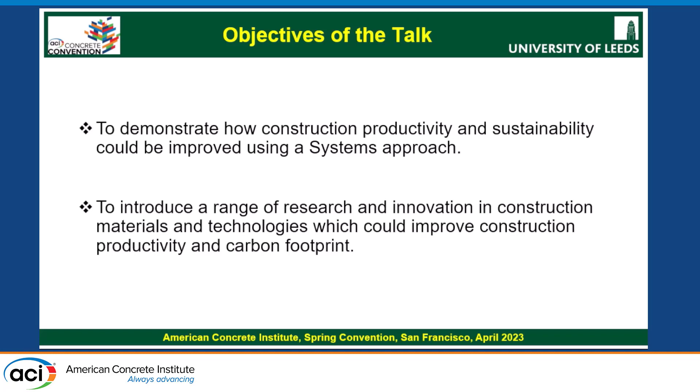The objective of the talk is to demonstrate how construction productivity and sustainability could be improved using a systems approach, and to introduce a range of research and innovation in construction materials and technologies which could improve construction productivity and carbon footprint. Those are the two objectives for this presentation.

The outline is as follows: I want to mention the productivity and environmental challenges in the construction industry, and the justification for a systems approach to deal with these challenges. After that, a brief introduction to different technological innovations which can benefit building productivity and sustainability, and finally I will conclude with some remarks and recommendations.

So first is productivity and environmental challenges in the construction industry. I just want to say this talk was initially prepared for 40 minutes, but then cut down to 25 minutes, so I'll hopefully finish in 25 minutes.

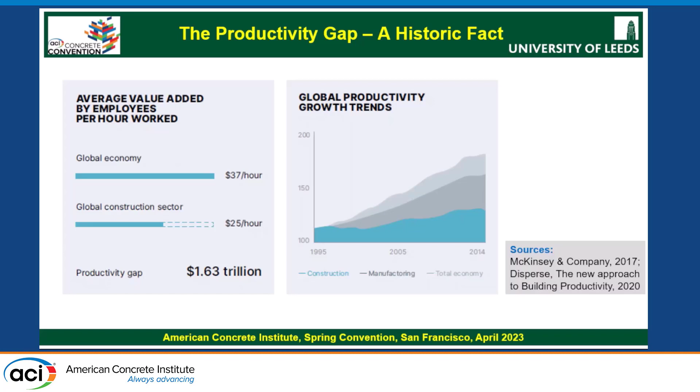If you look at this graph, you can see the major issue with construction productivity. Global economy is at $37 per hour, and if you look at the construction sector, it is 25. There is a productivity gap of 1.63 trillion US dollars, according to a report in 2017. That gap can be seen here - the construction sector is the blue, compared to manufacturing and the total economy. So naturally, we have a serious problem in the construction sector.

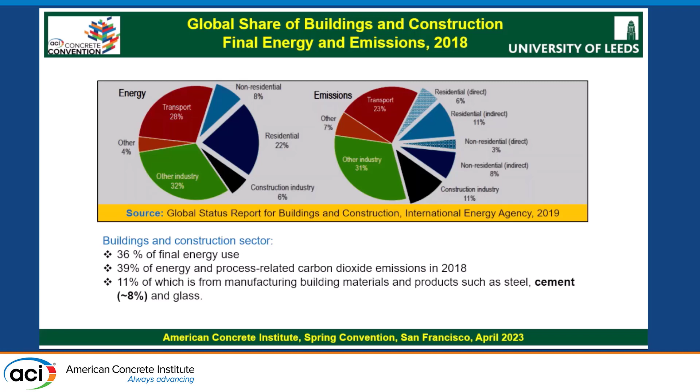11% of which is from manufacturing building materials and products such as steel, cement, and glass. And as you know, cement contributes to something around 8%.

So all of us are aware of the UN declaration as well as different countries trying to get to net zero, and we are possibly on the right track. You can see the carbon footprint coming down, and we are hoping this will hit very close to zero by 2050.

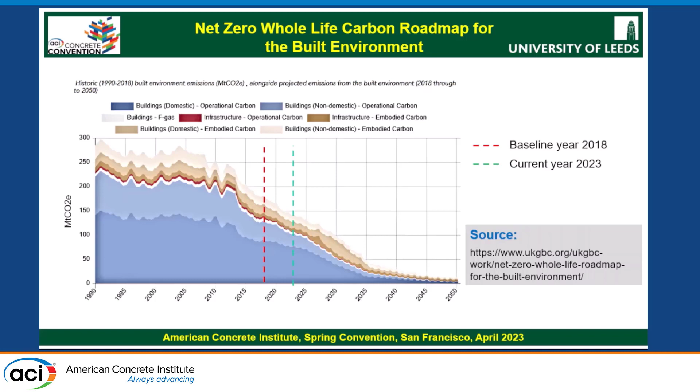In order to achieve this, what are the ways we can achieve it? This is where a systems approach would be really useful. So to address both the construction productivity and the carbon agenda, we should be able to use a systems approach.

Why am I saying this? The Institution of Civil Engineers published a report recently, a systems approach to infrastructure delivery. When you read through that report, you will see how construction productivity can be improved and how the carbon agenda can be addressed. I thought it important to introduce this report so you can see how each of the sectors where you're working could benefit from it.

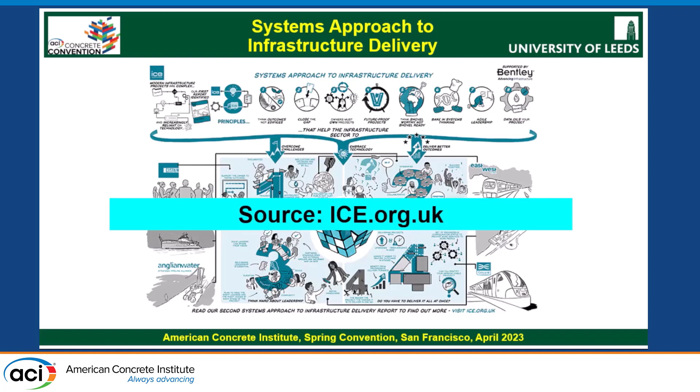In the systems approach to infrastructure delivery, there are 4 fundamental principles to look at: systems thinking, systems engineering, systems integration, and the extended system. Systems thinking embraces the idea that the whole is more important than the sum of its parts. In the construction sector, this is a major problem, as you know.

Each construction delivery team will be looking at their own particular aspects. What we need is to bring them all together and consider the whole system, understanding how all the component parts of a project work together to meet a common objective. Okay, so that is systems thinking.

Systems engineering is the application of systems thinking to engineering design and management. It helps different teams working on individual components of a project to stay aligned to a common goal. I'll just elaborate on some of these aspects.

Then systems integration is the practical task of bringing together all of the components and taking them into service as a single, fully functional system.

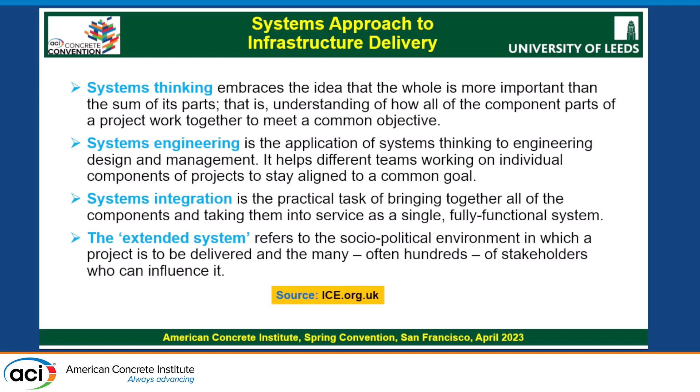Finally, the extended system refers to the socio-political environment in which a project is to be delivered, and the many, often hundreds, of stakeholders who can influence it. In a project like this, you can see how different stakeholders can come together to enable the improvement of construction productivity and address the carbon agenda.

There are 8 strategic principles given in this report, and the objective is to overcome the challenges, embrace technology, and deliver better outcomes. The strategic principles are: think outcome, not edifices; close the gap; owners must own the projects; future-proof projects; think shovel-worthy, not shovel-ready; bake in systems thinking; agile leadership; and data oils your project.

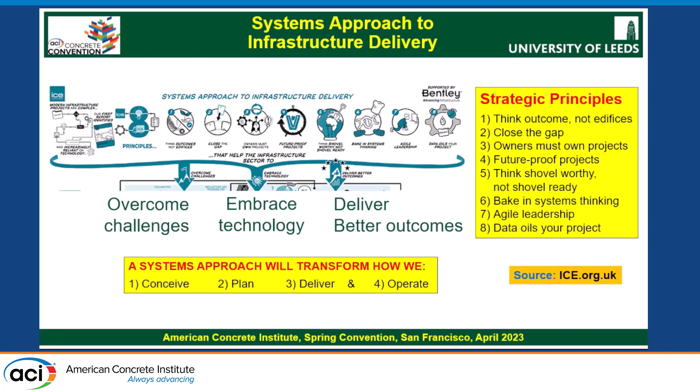In this report, each of these aspects is very elaborately covered, so anybody interested can look at these concepts. A systems approach will transform how we conceive, plan, deliver, and operate a project. It's a holistic concept of a project rather than looking at it in parts, and when you do that, you achieve the productivity and carbon agenda for a particular project.

In the UK, this systems approach was used in many projects, some of which are listed here. These case studies are also mentioned in the report. If somebody is interested to see how the systems approach was applied in different projects, you can see it. One is the Tideway project.

The second is the British Antarctic Survey's Infrastructure Modernization Program. The Crossrail is the third one. East-West Rail is the fourth. The Anglian Water Strategic Pipeline Alliance is the fifth, and Costain's systems approach capability is the sixth.

You can actually see in different sectors the systems approach was applied in the UK, and they concluded based on the assessment that the systems approach benefits both construction productivity as well as reducing the carbon footprint.

The cross-cutting lessons learned from these projects are: keep the end in mind throughout the project, ensure we are all in this together, meaning all stakeholders should work together with a common objective. Think hard about the leadership - who should actually be leading the project? And do you have to deliver all at once? The way the project is managed for delivery needs to be planned in such a way that all of these concepts can be applied.

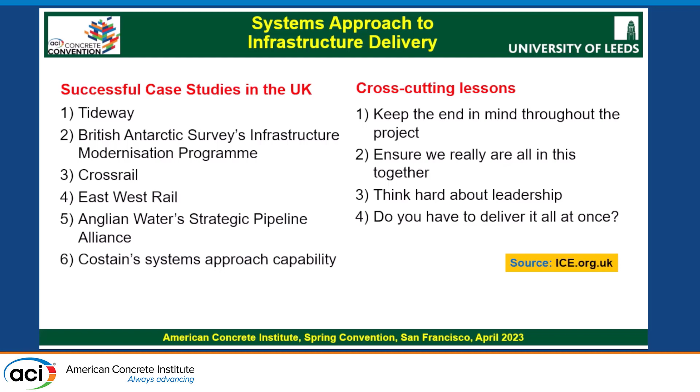So the principal lesson from all of these case studies is that construction's traditional heroic style of leadership is not fit for purpose for modern projects. The sector needs to adopt leadership models that spread authority and empower highly competent individuals. That is one takeaway message from all these projects.

So this report, I'm not introducing in full. The principles of the report you can actually download and read - I think it's freely available. So I'm just sort of introducing those.

And in our industry, some technological developments have been taking place, and we can see how the technological developments and innovations are contributing to systems thinking. So just a few minutes I will spend on that.

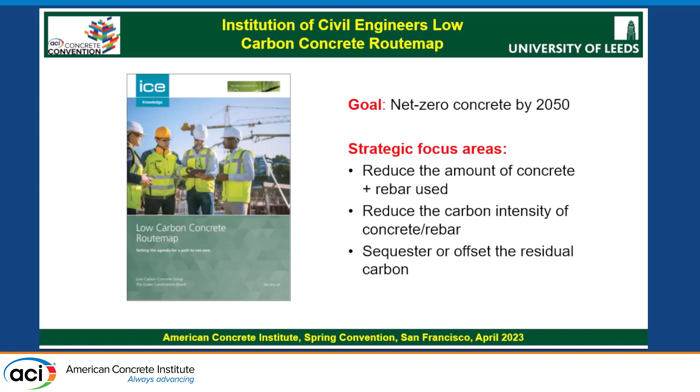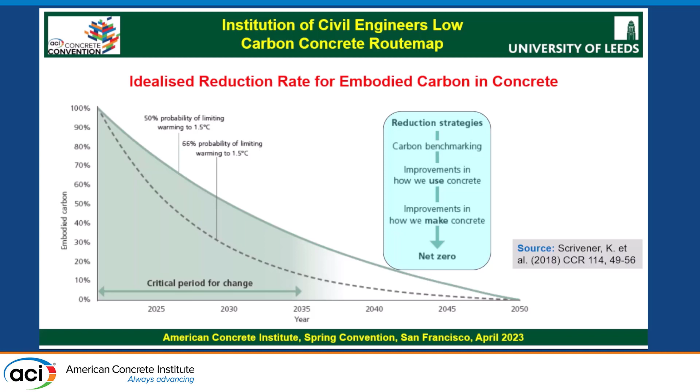As I said, I'm not presenting all the details of any of these reports. I just wanted to introduce these concepts so that you can see what is going on in some other countries in terms of addressing the carbon agenda.

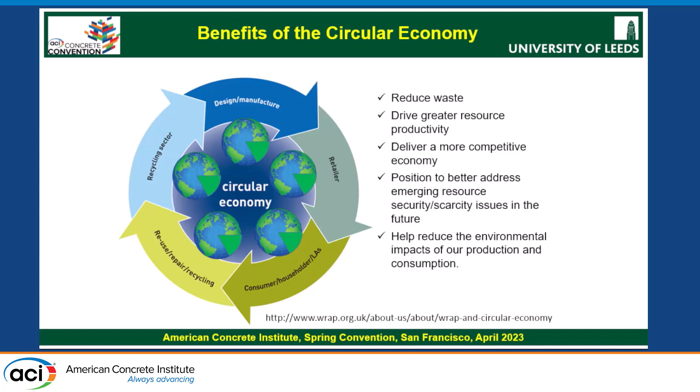So obviously, when you think of the carbon agenda, the circularity of the economy can be an important aspect to consider. It will reduce waste, drive greater resource productivity, deliver a more competitive economy, position us to better address emerging resource security or scarcity issues in the future, and also help reduce the environmental impact of our production and consumption. So the circularity concept definitely needs to come into our construction industry.

In terms of the material used itself, you can actually try different carbon neutral materials, and thereby some of the carbon agenda can be addressed.

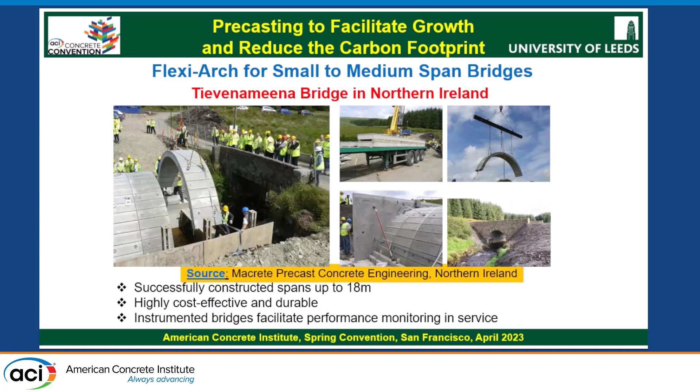This particular one is the finished small bridge constructed. This was a technology patented by my PhD supervisor, Professor Adrian Long, and it's now marketed by a company in Northern Ireland called Macrete.

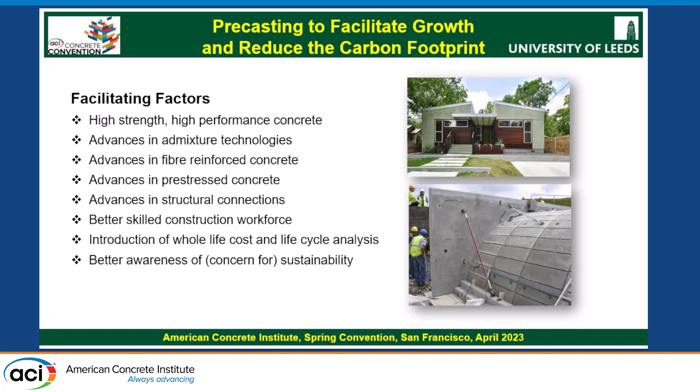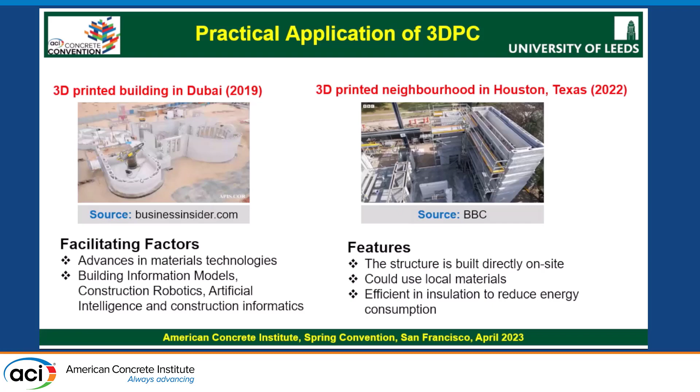If you compare the traditional concrete manufacturing procedure with 3D printing, some of the advantages are: free from formwork, less labor, saving in construction time, better working environment, less construction waste, reducing risk of construction, reducing energy consumption, and reducing the cost. So there are so many advantages, which means we need to be focusing more and more on this type of construction technology for advancing the industry.

And when we do that, productivity improves and the carbon footprint goes down. I'm happy to see many people focusing on the use of different types of cementitious materials, but please remember, all you can save is 8% of the carbon footprint, but the industry itself is 39%. In order to address that, other means of reducing carbon footprint have to be resorted to, and these are some of the technologies.

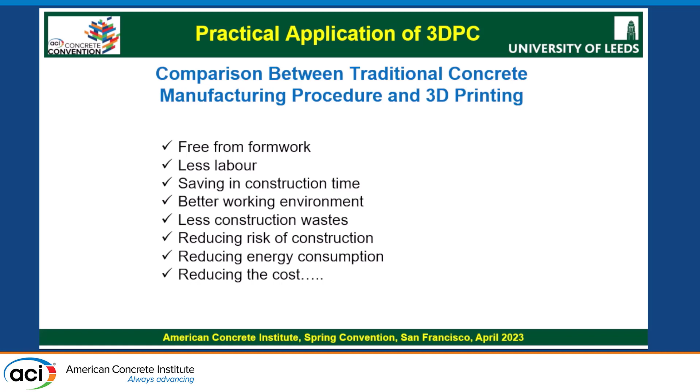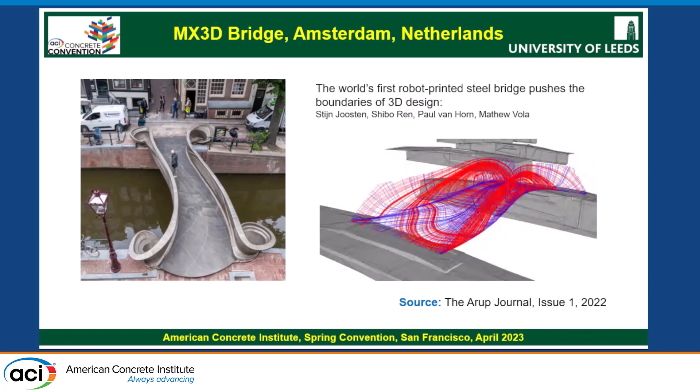Larger constructions as well, and construction robotics is another field. The drivers are high level of construction and growth expansion activities, unsafe environment, injuries to labor, and things like the COVID-19 pandemic and the uncertainties associated with them. So we can make use of construction robotics in such cases and thereby improve construction productivity.

Typical construction activities using robotics are structural demolition, bricklaying, assembling prefabricated components, welding arms, construction of road pavements, unlocking of design possibilities, and aerial surveys. So many different applications we can make use of construction robotics for. More research needs to go in there so that we can develop this area further.

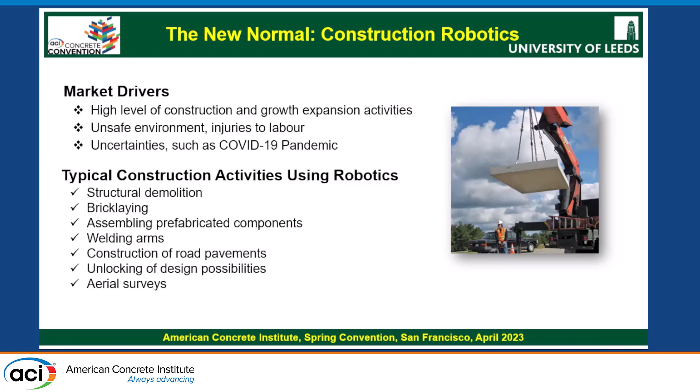And this is an example called virtual sieve analysis. An image-based system is used for grading the aggregate, which means from the information gathered, you can decide how much cementitious material to use. Rather than a predefined amount, depending on the material on the conveyor belt, you simply take a picture and use image analysis to decide the particle size distribution, and then find out how much material is needed. This helps reduce the amount of cementitious material used.

This was a work we did some time back, and this technology was patented as well.

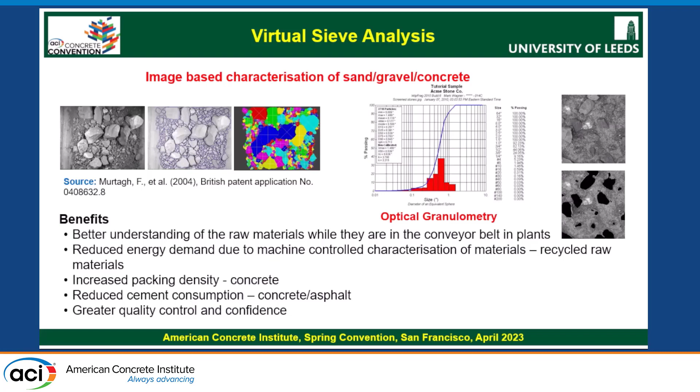Another one is the use of structural health monitoring. This has become quite popular, and SHM can be used for whole life management of infrastructure. People have started using it.

The benefit is this: structures usually follow a certain pattern. If it's a nuclear containment structure, you design it for the whole intended service life. But most structures will have a certain level of deterioration, and when it hits a minimum acceptable level, you intervene and repair it. So if you have sensors, you can detect problems early, and timely intervention and management of infrastructure becomes possible.

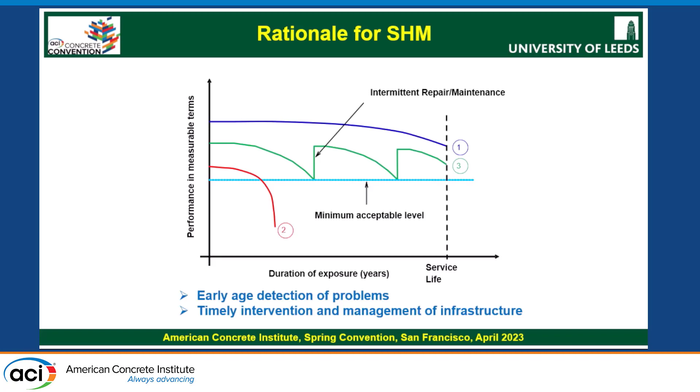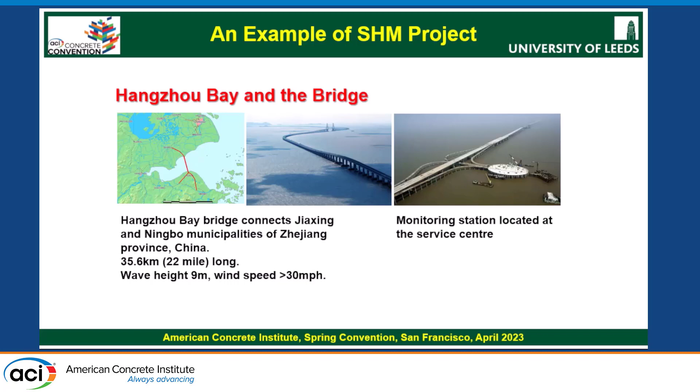Here we have an example where during the construction of the Hangzhou Bay Bridge in China, sensors were introduced and used for monitoring the performance of the bridge. Different types of sensors were used, both fiber optic and electrical, measuring properties like temperature, RH, pH, chloride, strain, moisture movement, chloride ingress, carbonation, and corrosion. So a combination of environmental features and the mechanisms of deterioration of the material itself can be monitored, and that information can be used for predicting the service life, helping us see how best to manage these structures.

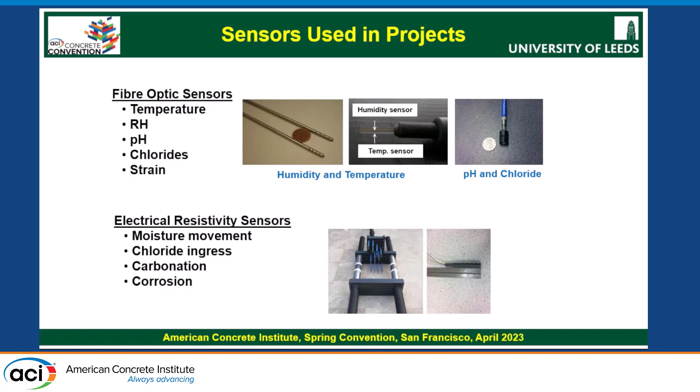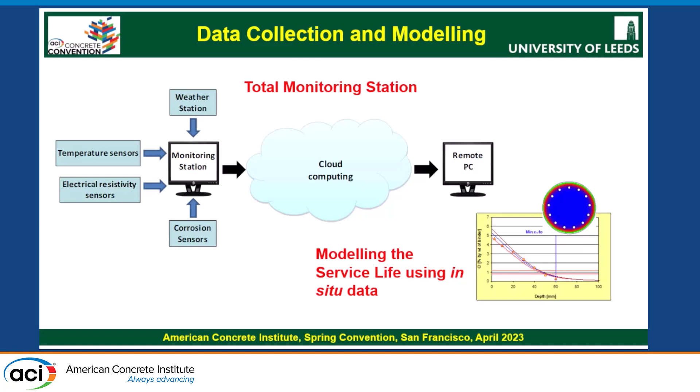The data can actually be collected from the office itself—there's no need to go to the site. Once you have the data, you can use service life modeling techniques to predict the service life. If you're a member of Committee 365, you know there are different service life models for fresh state and hardened state, and using those you can predict the service life.

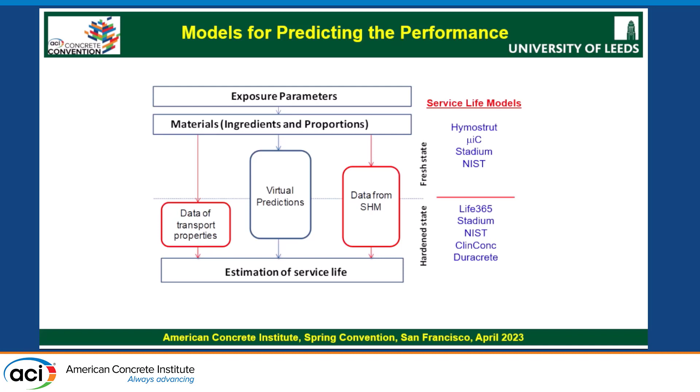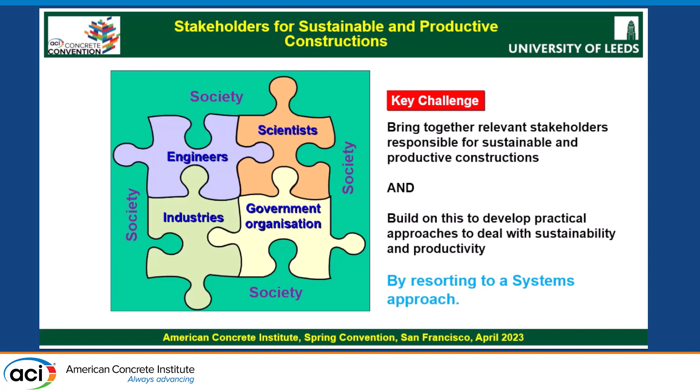In order to do that, the systems approach can be used. As a reminder, it has 8 basic principles, and the objective is to transform how we conceive a project, how we plan and complete construction, how we deliver, and how we operate. When you do that, the systems approach will improve the productivity and sustainability of civil infrastructure.

If you want to know more about the systems approach itself, the best thing is to download the ICE report. It has detailed information on how the systems approach can be applied to different projects.

This was an intro type of talk rather than going into detail. But as you can see, when you bring different concepts together, both productivity and sustainability can be addressed together, and thereby our industry can achieve the agenda of net zero. Thank you.